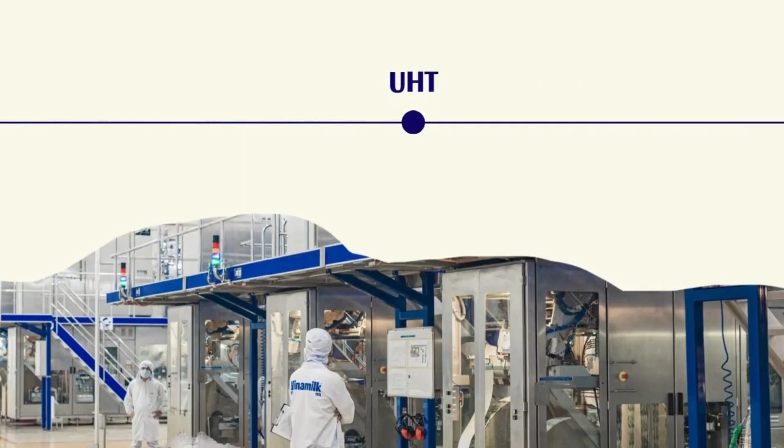Imagine opening a VINAMILK milk carton during breakfast. What you don't see is a long journey behind it, from raw milk collected on farms to high-tech UHT processing to packaging lines and finally traveling by truck to the world. That tiny box tells a global logistics story, and today we are going to unpack it.

VINAMILK claims a portfolio of nearly 250 different products across their categories: liquid milk, fresh milk, powdered milk and infant or child nutrition formula, condensed milk, unsweetened milk products, yogurt and drinking yogurt, ice cream, and chilled or frozen dairy dessert.

VINAMILK's material flow begins upstream with raw milk sourced from both company-owned dairy farms in Nghệ An, Lâm Đồng, Thanh Hóa, and contracted farmers supported with training, veterinary care, and feed inputs. Farms receive inbound materials such as feed, water, equipment, and veterinary supplies. Raw milk is collected from contracted farmers, transported to the collection center, and later to the storage center, where the milk will be moved to processing plants using cold logistics.

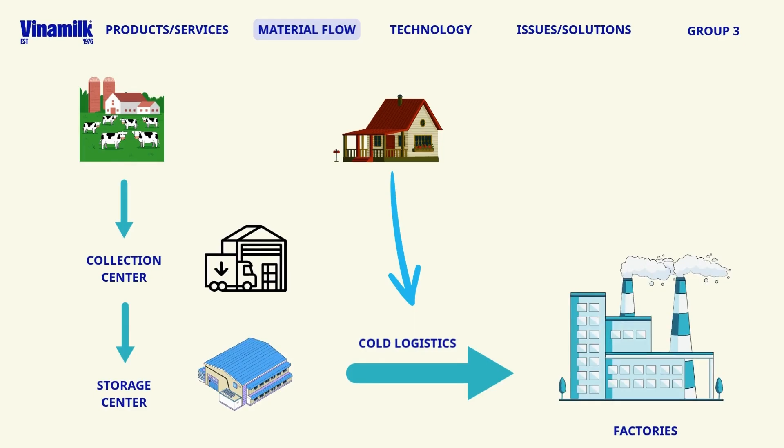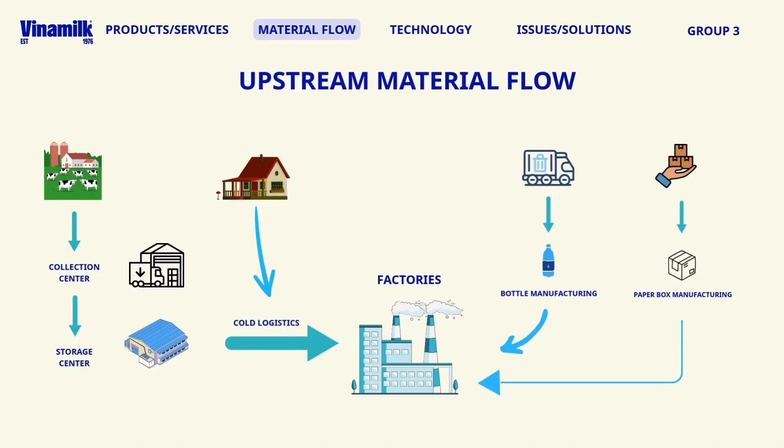For packaging, materials come from suppliers like Tetra Pak for UHT cartons, along with PET or HDPE bottles, collected from the public, plastic cups, aluminum foil, and labeling materials.

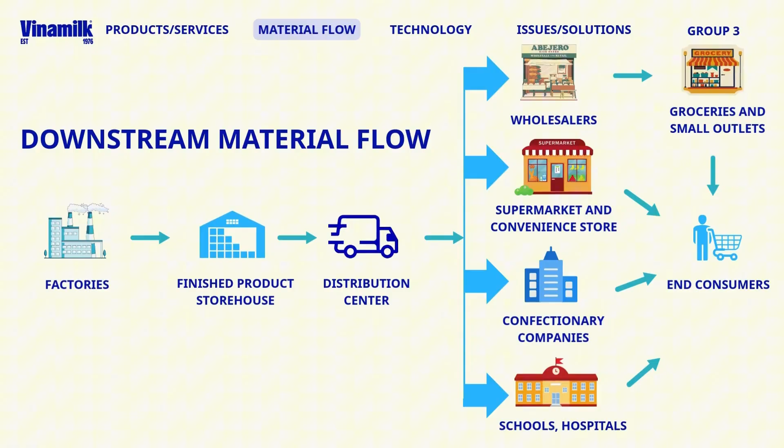Downstream, products are distributed through the centralized warehouse and multiple channels, including traditional retail, supplied by wholesalers to over 200,000 mom and pop shops, and over 600 VINAMILK stores, modern trade, supermarkets, and convenience stores, B2B customers, confectionery companies, schools, and hospitals. Reverse flows include product returns for expired or damaged goods, except fresh or chilled categories.

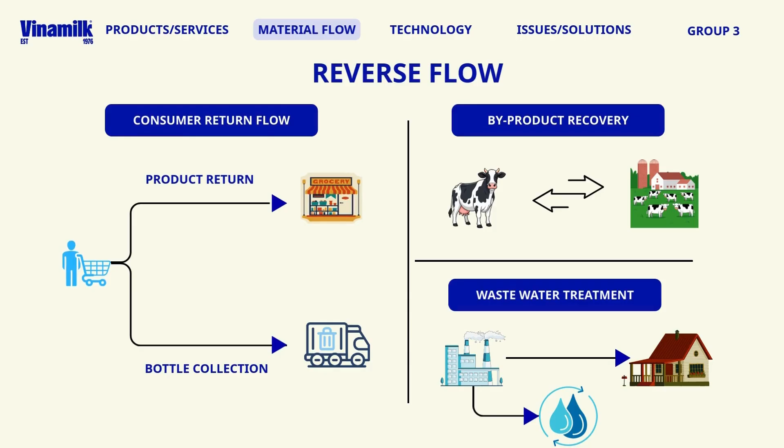Bottle and carton collection for recycling, farm byproduct recovery for biogas and fertilizer, and wastewater treatment and reuse to meet environmental standards.

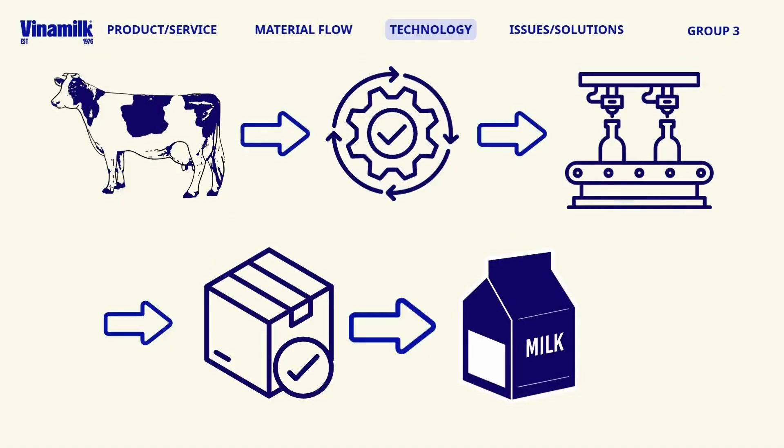Next is the technology system VINAMILK uses to operate its material flow. 1. The factory automation, Tetra Plant Master. This system links every unit of the factory from input, processing, filling, packaging to output into one unified, fully automatic flow.

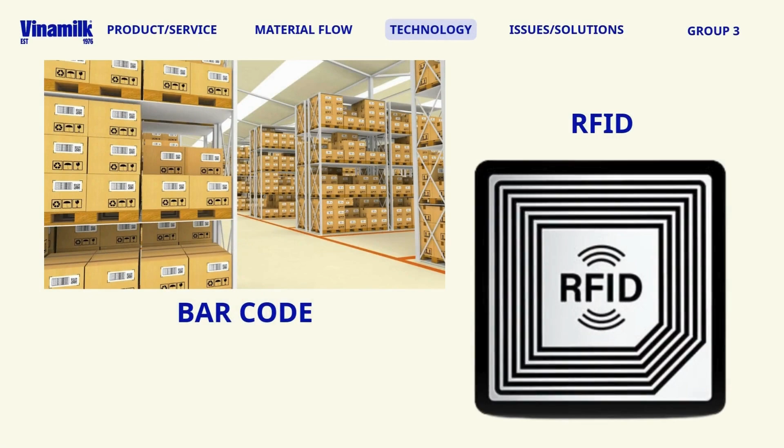2. The smart warehouse, WAMAS. With WAMAS, every pallet is scanned and recorded through barcodes or RFID technology and then located automatically by RGVs and stacker crane robots. FIFO is the method WAMAS uses when there is a warehouse out request, which is suitable for ensuring goods quality. WAMAS helps automate storage processes, with no manual forklift handling.

The integration with SAP ERP and Tetra Plant Master ensures a seamless information flow to support the EOQ method, avoiding overstock and stoppages.

3. Autonomous logistic robots, the LGVs. Inside the factory, VINAMILK deploys laser-guided vehicles, LGVs, to replace traditional forklifts. These robots automatically calculate the shortest route to move materials, transport packaging, raw materials, and finished goods safely and efficiently, reduce labor costs, and minimize the risk of product damage.

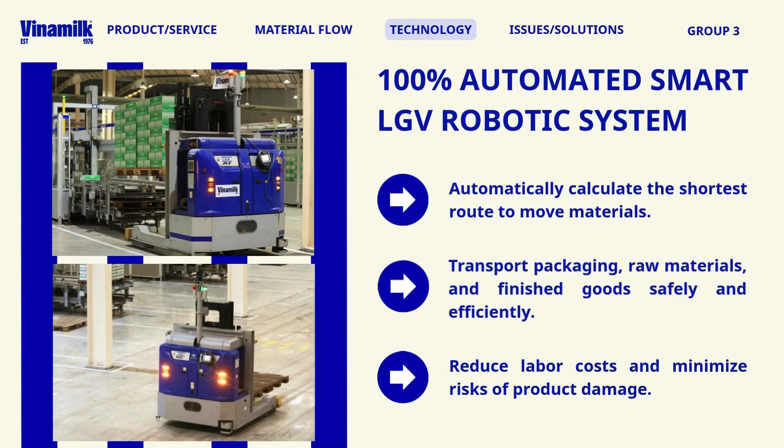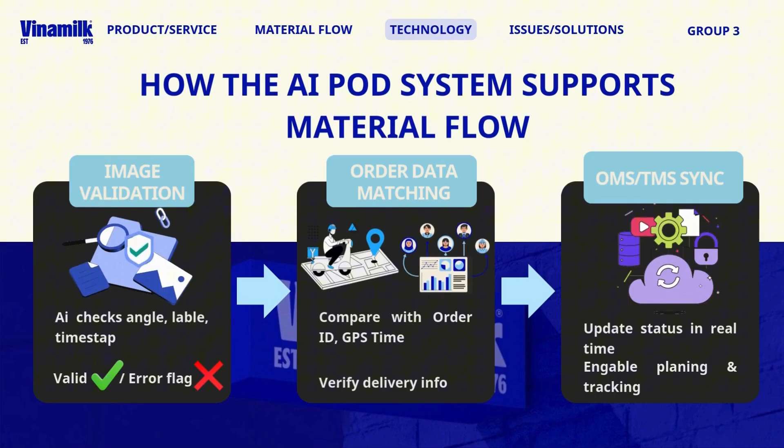Cloud-based AI system for POD, proof of delivery verification. In 2025, VINAMILK introduced an in-house AI-powered order coordination system for logistics, built on AWS. How the AI POD system supports the material flow: it automatically analyzes delivery photos to verify successful delivery, checks image quality, product labels, timestamp, and GPS coordinates, and immediately synchronizes results with the OMS and the TMS. It eliminates manual data entry errors, speeds up delivery confirmation, and shortens payment cycles.

Issue and solution. Currently, more than 55% of VINAMILK's fresh milk supply still comes from smallholder farmers. Although VINAMILK maintains its milk procurement policy from household farmers with a minimum scale of 20 cows to both secure supply and support the farming community, this model is generating significant logistics pressures in practice. A fragmented collection network, long transportation distances, and a large number of collection points have driven up the logistics cost per unit of milk. While this decentralized sourcing model helps diversify supply risk, it also reduces cost efficiency and overall logistics performance.

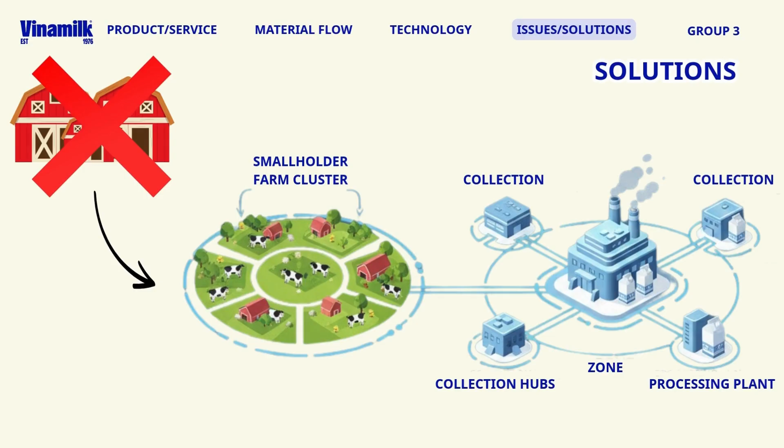From a logistics perspective, the solution for VINAMILK is not to eliminate smallholder farmers, but to restructure the milk procurement network following a cluster hub zone model, in which multiple farms are grouped into clusters and connected to a local collection hub before being transported to the processing plants. In addition, VINAMILK should co-invest in upstream logistics infrastructure for farmers through long-term procurement contracts, while also implementing regional sourcing strategies and disaster-resilient buffer warehouses to enhance the overall resilience of the supply chain.

In reality, VINAMILK has already implemented many important supply chain management initiatives, such as developing high-tech dairy farms, setting up regional collection stations, applying strict input quality controls, and diversifying sourcing across the north, central, and southern regions of Vietnam. However, advanced logistics solutions such as mandatory farm clustering and large-scale co-investment in upstream logistics infrastructure have not been fully implemented. This is mainly due to the extremely high investment cost, the legal limitations in reorganizing farmers, and the financial risk that the enterprise would have to assume.

Therefore, the challenge of sourcing fresh milk from smallholder farmers is not solely a business issue of VINAMILK, but also requires coordinated support from government policies in terms of land use planning, infrastructure development, and sector-wide assistance, in order to build a more sustainable and efficient fresh milk supply chain in Vietnam in the long run.